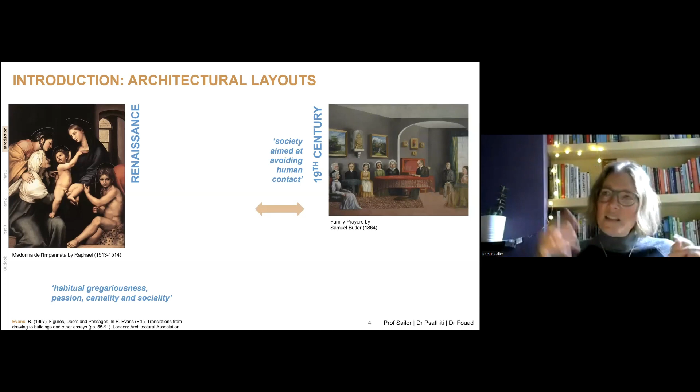A society that is based on human encounter. In the 19th century, looking at the painting by Samuel Butler, he says this is a society aimed at avoiding human contact. All of the people are kept apart, they sit by themselves, no one is even looking at each other, people are not touching. He says this is reflected in the floor plans of the time.

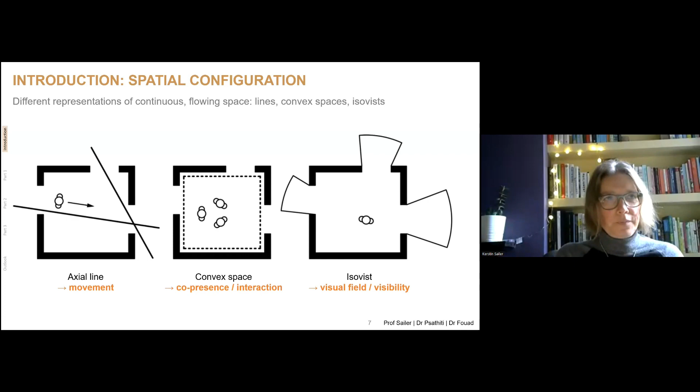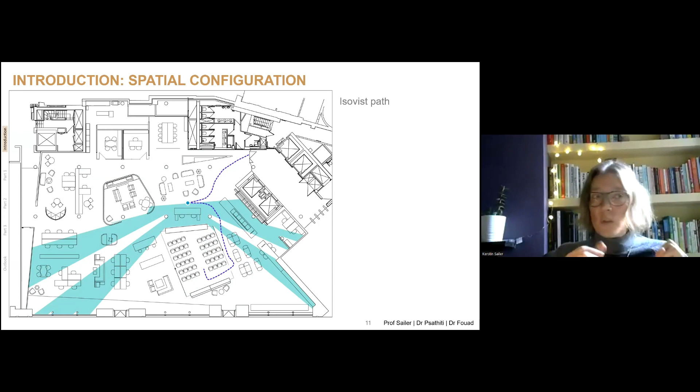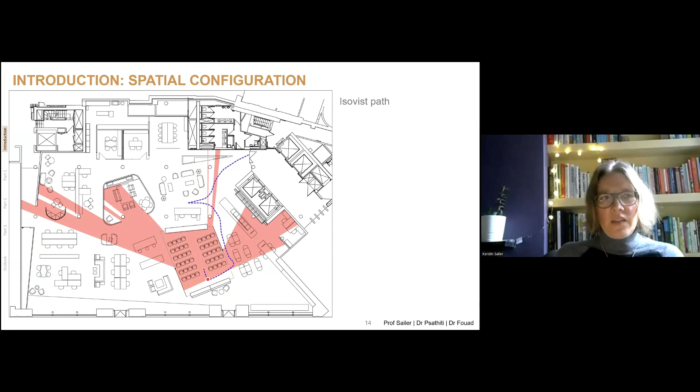As you stand in front of the reception, your isovist becomes a little bit smaller, a little bit more contained. They then send you to the seminar room. So as you walk past the kitchen, you turn, you enter the seminar space. And this is the perspective that you would have as the speaker of the seminar.

So all of those different realities would have happened consecutively, one after the other, as you walked through that space. If we overlay them, we begin to get a little bit more of a collective picture of what you have been able to see while you walked in there.

And you can see that certain areas have lots of overlays, so those are more visible from a lot of other locations, whereas there are some areas, for example this group of seats here, that you have not seen yet so far.

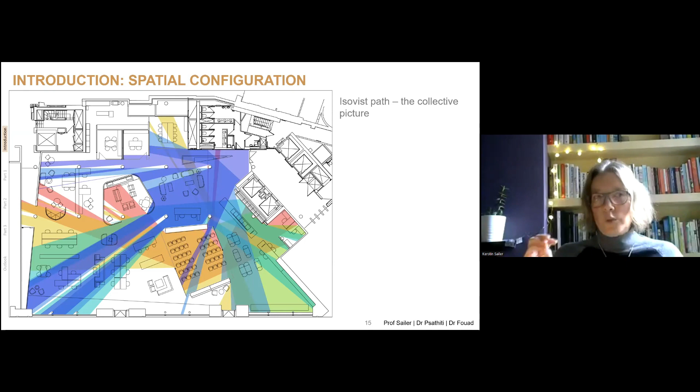So it's more hidden. Now imagine we do this kind of isovist generating from every single small location in the floor plan, and we systematically check any point location A to any other location B - how often do I have to look around the corner with these isovists - so we get a shortest path. And with that shortest path, we can then calculate how integrated a location is or how segregated a location is in the overall system. Why does that matter?

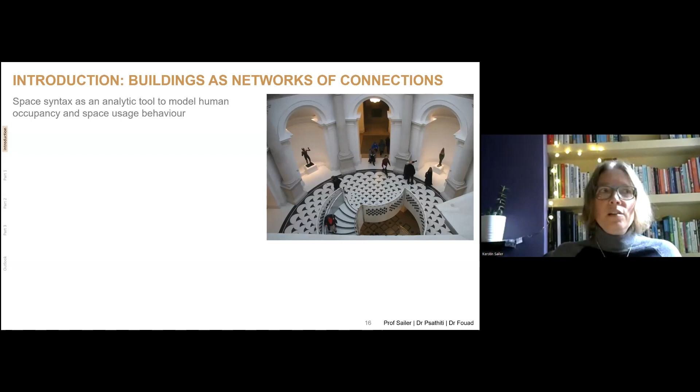Well, with looking at layout configuration in this kind of way, we can model human occupancy and space usage behavior. This is an example of a piece of work by colleagues of Bill Hillier, on the Tate Britain, a major museum space in London.

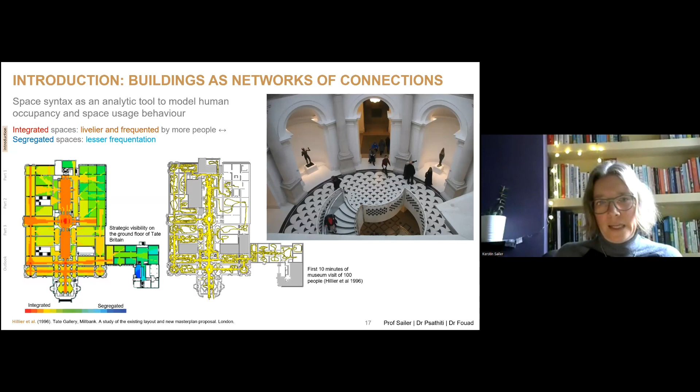So if we apply this idea to school buildings, in the course of this presentation we want to lead you through three different aspects. The first is school life - what kind of things happen in these school buildings in relation to its spatial configuration. Then we look at user perceptions, and those users can be teachers as well as students. And then finally, we want to look at managerial aspects - what happens when the school management, the senior leadership team, the head teachers, work with configuration, and also how they sometimes change the kind of movement flows.

So let's have a look. I will start this off with a piece of research that I have undertaken myself before I then hand over to my two esteemed colleagues.

In this piece of work, this is a book chapter published in 2019. The chapter is called Corridors, Classrooms, Classification. In this I make an argument about how the school layout becomes important for pedagogy and social behaviours. I bring together various aspects of learning spaces - I've listed a few of those, but if you're interested, please have a look and find that chapter online and you can read it.

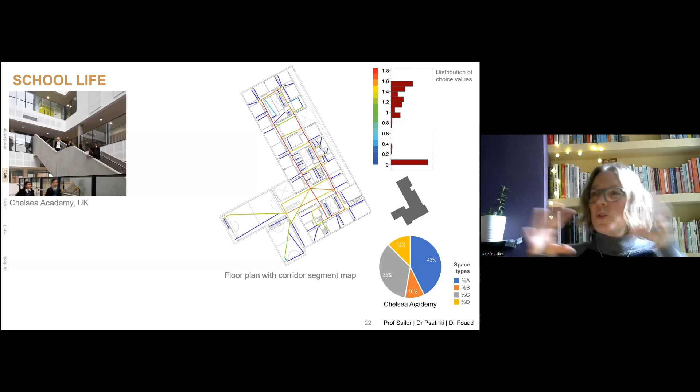And then we have D spaces that have more than one loop. D spaces are spaces where you have lots of choice locally—where you want to go next, you can decide quite freely. So those are the kind of configurational metrics that I want to look at in all of these examples.

If we look at this school here, what we can see is that there are two corridors, so it's a double corridor system. That gives quite some choice of how to move from one space to another. But locally, you can see here only 12% of these spaces have that much choice, so it's a rather traditional school with corridors and classrooms.

But as you can see in the photograph here, there's a lot of glass, so from the movement corridors you get those glimpses into classrooms. There's a little bit of overlap between movement and occupation.

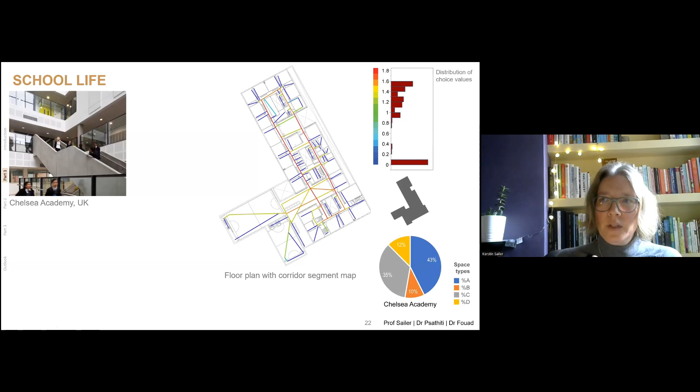If we look at the social life in the school, here's one quote from the book chapter: a particular concern of the pupils was the circulation system, since the school had to implement a one-way system to ease overcrowding between lessons. So here you get a glimpse of managerial interventions, where those two narrow corridors got really overcrowded, and the school introduced a one-way system to cope with that.

You should know that in the UK, students leave their classrooms after every lesson, and all 1,000 students would move to a new classroom within 5 minutes. So there's a lot of movement that happens in a very short point in time.

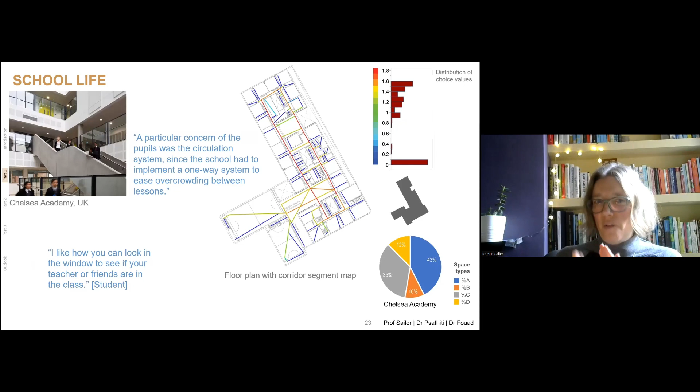Here at the bottom of the slide is a quote from a student who said, "I like how you can look in the window to see if your teacher or friends are in the class." So you can see that there is some kind of overlap between movement and occupation.

If we look at the second example, Kingsdale Foundation School, the school was refurbished. Initially you only had this kind of big loop with all of these buildings and those corridors going through here. But then the school was refurbished, and the interior courtyards received this big roof—they were roofed over, and those additional spaces in the center were created. That changed the school layout quite significantly to offer more choice.

So what we have here, again, is that double corridor system. You can see that choice is a bit more distributed here than it was in the previous example, and we also have a higher degree of local choice with more D and C type spaces.

The principal of the school talked about the previous design before it received that new roof and those interior spaces added to the school, and commented that it was an avalanche of bodies in the corridors breeding conflict. So it was really seen as problematic, similarly to Chelsea Academy, just too narrow corridors and lots of conflict. And the new design was meant to calm down and deinstitutionalize the space.

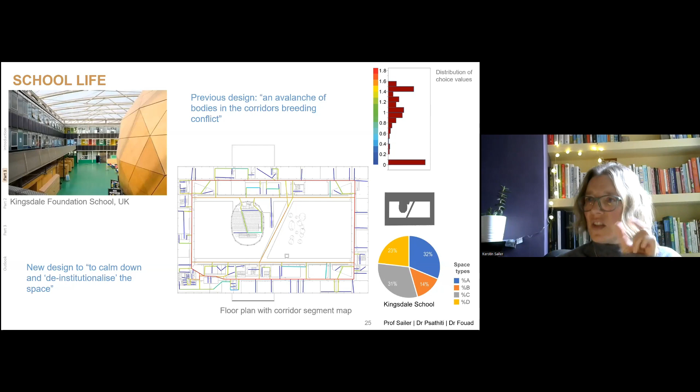You can see again that there's quite a few windows. So as you walk on those new corridors, again, you can get glimpses into the classrooms. So again, some overlap of what is happening as you move through the school.

The third example is a much more open school building, UCL Academy, in the UK. What you have here is, in some places, the corridor is completely dissolved. So you can see in this photograph here, a so-called super studio, those three big studio spaces that can host up to 3 classrooms in parallel. And the internal corridor here is not separated from the super studio, and as a result here becomes the most integrated line of movement.

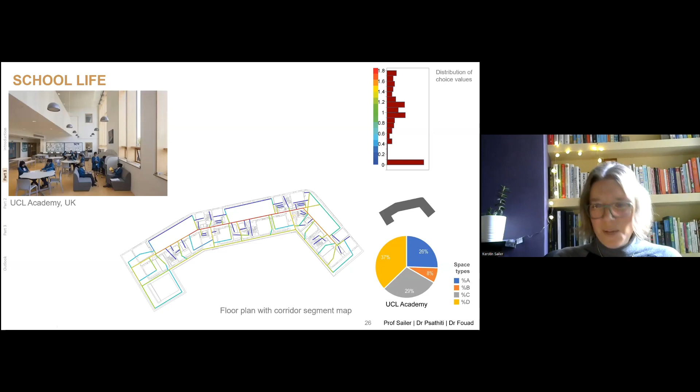You can see here in the distribution that this is reaching up much higher than in the previous examples, and also has a really big amount of D and C spaces, as you can see here, 37% of D spaces. So a lot more choice in the system. What happens when you add school life into the equation?

We've got anecdotal evidence from conversations with teachers here that suggests that the exterior corridor - there's a second corridor down here - is used less frequently than the interior one, despite teachers preferring students to take the exterior path. The teachers always tell the students, can you please use this kind of pathway on the outer rim of the school? But the inner corridor just offers a lot more internal connections and is the shorter path, so a lot of students would prefer to take that.

And this school building will feature much more in depth in the work of Dr. Fouad that you will see later. So this was an initial analysis, and then we decided to study it further.

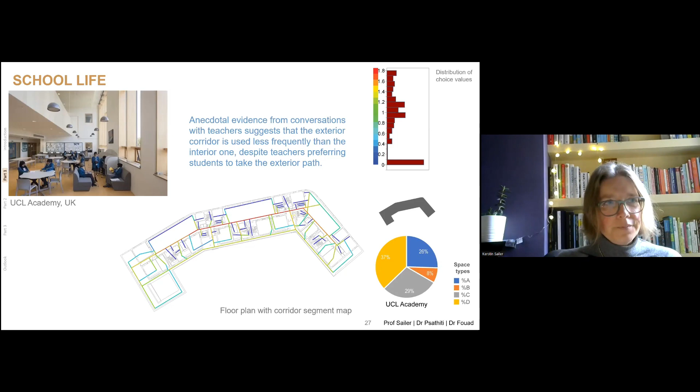The Ørestad Gymnasium in Denmark is, again, a very open school building. You can see this grand staircase in the photograph in the center that loops itself up through the spaces, and as such attracts a lot of the kind of movement paths around here. So there is not a lot of local choice, because once you're in the system, you are confined to those kind of central corridors, but there's a lot of overlap between all of the teaching activities and movement.

And this is also what you can see in school life reflected. So the principal has said it is a building that fits the pedagogy we're aiming for and that forces us to work differently. So that's interesting to kind of think about those two in tandem - what kind of pedagogy do we need for what kind of building structure?

And then from one of the teachers, a comment: I think it is so cool when you walk around that you can see your co-workers. Oh, someone is teaching there. What is he or she doing? Then you can stand there and watch and think, ah, okay, that is another way. I could also have done it like that. So there's kind of learning happening between the teachers on how to teach.

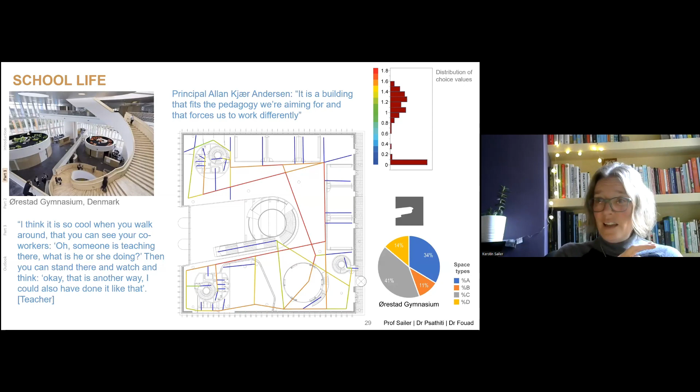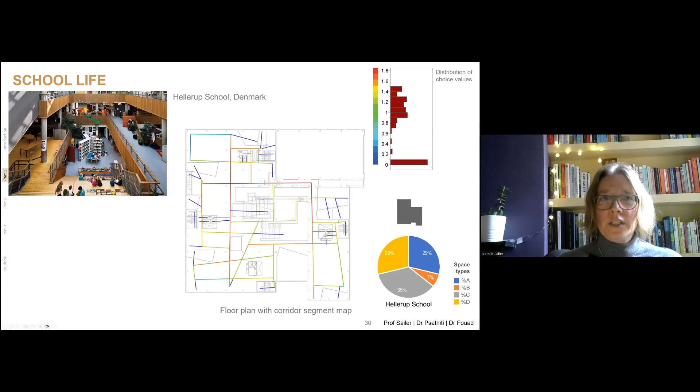And the final example, Hellerup School in Denmark, is a very open school. Yet again, as you can see from the photograph, there's a lot of local choice in the system. So you can see all of those loops in the layout here, reflected in this relatively high figure of D spaces, but not quite so much global choice in the system, but again, a lot of overlap. And again, managerial aspects come in here.

So here's a quote from one of the teachers: We as teachers and the children create small, intimate spaces with inventory on a daily basis. We use mobile partition walls to eliminate visual and audio-based noise. It is helpful for the children, especially the younger children or the not so integrated children, to have a sensation of, this is us, this is where we are. It is about creating a sense of joint ownership.

So what you see here is a school building that by its layout is very open and allows a lot of overlap. But then the teachers kind of close that off in daily activities, at least to some degree, to create more intimate teaching spaces.

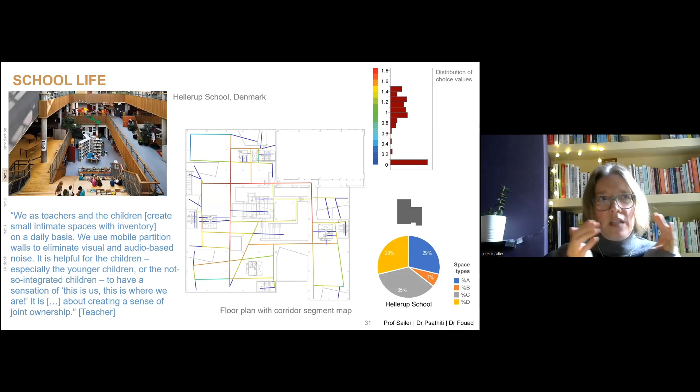So what this allows us to do, in summary, is offer an opportunity to look at school buildings in a detailed, nuanced way—not just say a school is closed or open with fixed pre-assumptions of how this would work, but rather look at the details and appreciate what exactly the spatial layout will do to the users, getting glimpses into school life.

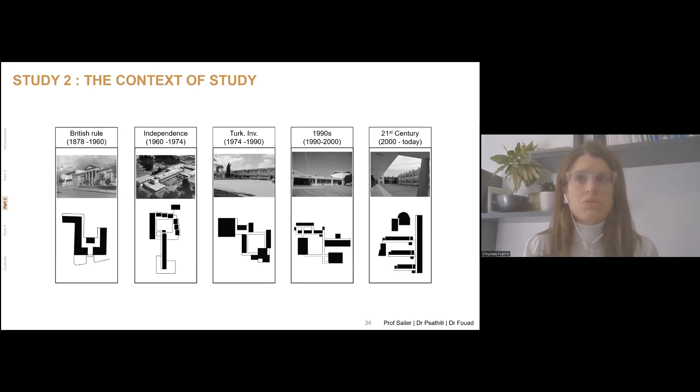Since 2000, the technical department of the Ministry of Education and Culture has assigned the design of school buildings to various independent architects, based on particular design guidelines that the ministry provides.

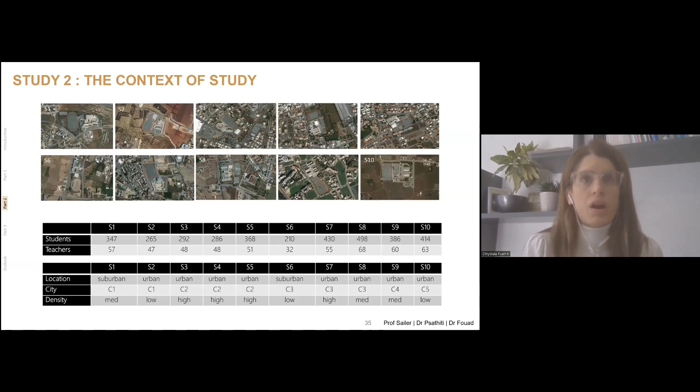Based on the fact that after 2000 we have 10 secondary school buildings built in Cyprus, I thought this offers a good common base, since they've been designed with the same design guidelines but by various architects. As you can see on the table, the 10 buildings differ significantly as regards the number of students, teachers, their location, or the density of the surrounding area.

As I mentioned, all of these schools have been designed based on particular design guidelines. Here I tried to visualize some of the most important guidelines provided by the ministry, capturing slightly the relationships between the spaces proposed there. For example, they propose the sports outdoor area be related to the sports indoor area and directly connected to the parking, located on one part of the plot. I'm mentioning this because it will make sense afterwards.

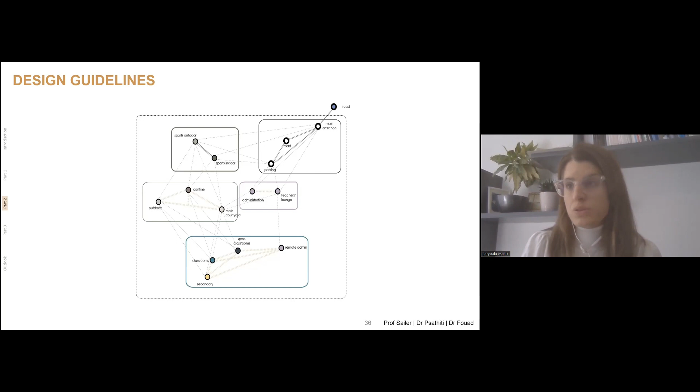So as you see from the functional allocation, the dark gray area is the sports area. All of the architects, without even collaborating, decided to put the sports area on one part of the plot. This served the ministry's purpose of having different access, so it could be operable after school hours—that's why all of the architects made the same decision.

Equally important, in the middle of the schools there are these light blue colored areas that are the courtyards. All of the schools are defined to a certain extent by the courtyards. Some schools have one central courtyard, such as school 1, while other schools have more than one courtyard—smaller courtyards and functional stripes associated with circulation lines.

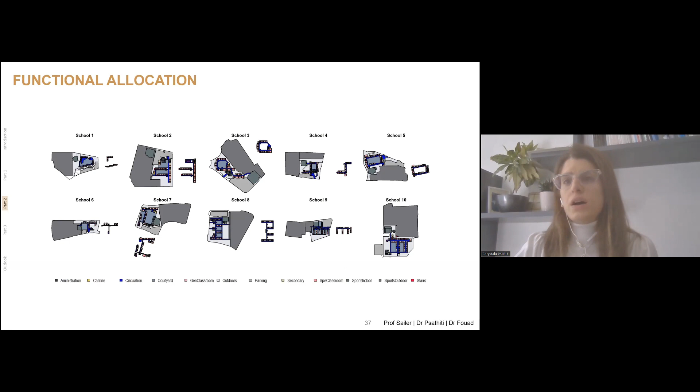If we could move forward, as you can see here on the composite assemblies of the built form, we have two different building types, school building types in Cyprus. We have the courtyard-based schools that are defined by this single courtyard in the middle of the school.

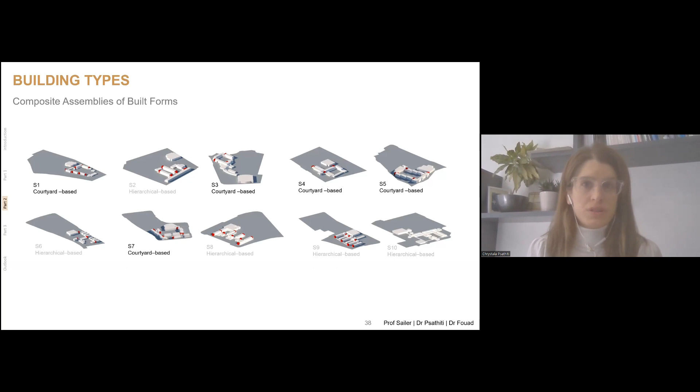And we have the hierarchical-based schools that are defined by various smaller courtyards and linear circulation systems. Next slide, please. This research, in order to understand more in-depth the spatial configuration, user perception, and school life, studies two schools into more depth. So here you can see the analysis that you have seen earlier from Kerstin, again a segment analysis, and we are studying here the choice metric.

So with the red areas, we're showing the areas that offer more movement potentials, are more integrated, and are more likely to be selected as a path, as opposed to blue areas that are more segregated and less likely to be selected.

By comparing the two schools, we can see that both schools have in the middle a red area, a very integrated area in the middle. The main movement corridor, let's say, is depicted by the analysis. In the case of school 2, the main movement corridor is depicted more, it's more red, because the two images are comparable.

But what is common also in those two examples is that the sports area that is on the left side of the plots is really, really segregated, so very distant from the main school unit, both functionally and behaviorally.

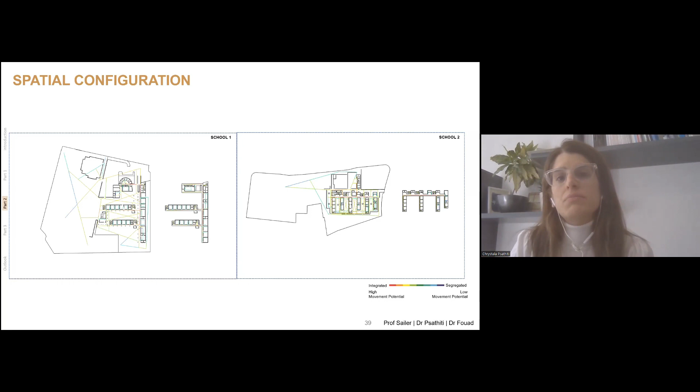So having said that, let's move to the next slide, please. We would like you now to answer for us which of the two schools do you think fosters a stronger school community based on what you have seen, at least for now. So if Ivan can take over just to circulate through this.

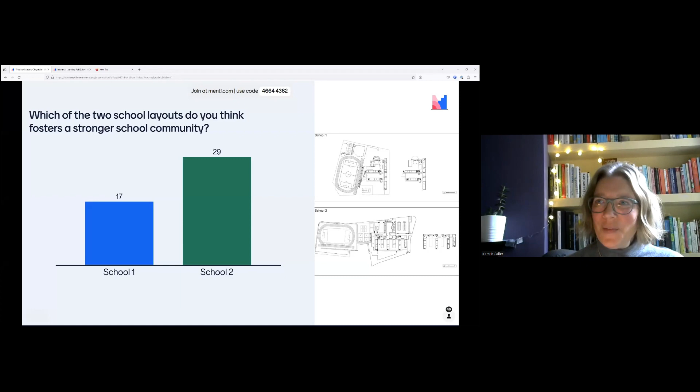Okay, so I won't answer which one, but we will find out, just to keep you more excited until the end. So I will give you now more insights into the school life of those two schools in order to be able to see whether your projections are right or wrong. So let's go to the next slide.

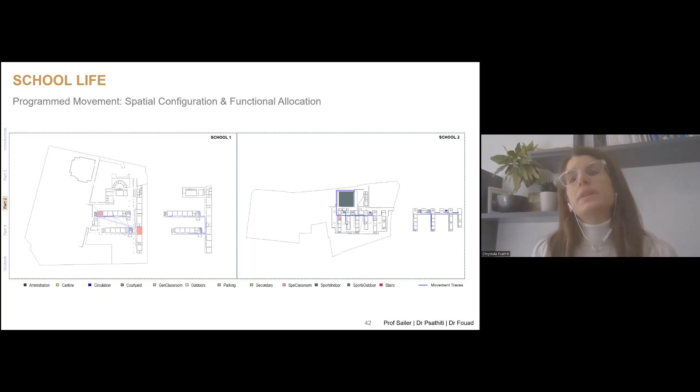Also, the importance of attractors for movement traces has been revealed by studying the entrances to the schools. I followed students entering the schools and traced the paths. School 1 has solely one entrance, while school 2 has three different entrances. This means school 1 releases students from a singular location, which is why the entrance area is very densely populated, as opposed to school 2 where users are split across those three entrances.

But again, we can see the role of spatial configuration, because those main movement corridors that we saw earlier on in the analysis are again selected by the students as their route towards their class or where they want to hang out until their lesson starts.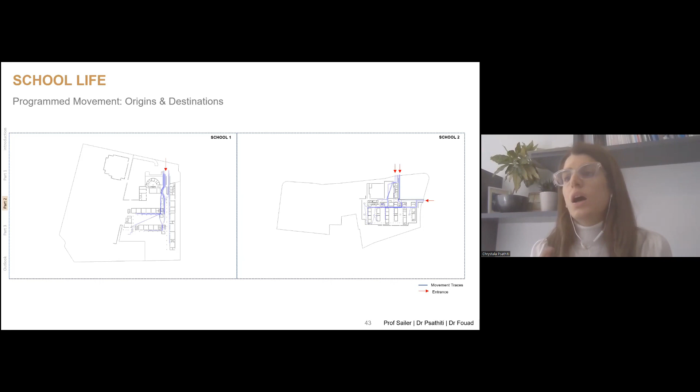However, movement is not always programmed, as I explained earlier. It's also unprogrammed and happens during breaks. So I also studied movement in schools during their free time, their break time. In this case, I studied them with a different method called snapshot, where it's like taking a photograph of the area and tracing the location of the students or moving individuals in the area.

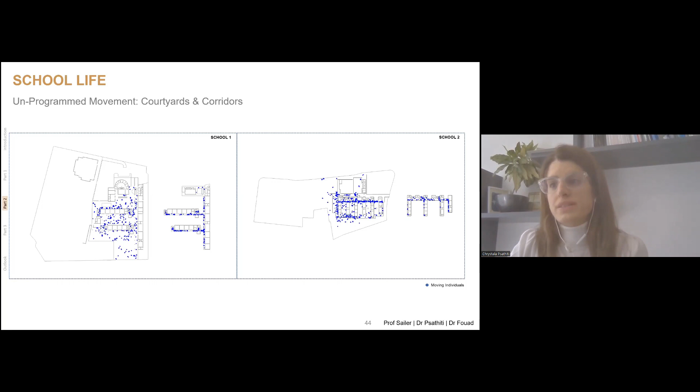What was very interesting by studying the movement distribution during breaks was that I realized none of the users, none of the students, used the sports area. This is very strange because they were free to go wherever they wanted, but in fact they weren't so free.

Both principals and both head teachers decided to eliminate the outdoor area, and it's here where the managerial aspects overlap with the spatial potential given by the schools. Because, as we saw in the analysis, those areas were particularly segregated, the school principals decided to limit the zone of operation for students in order to be able to control them.

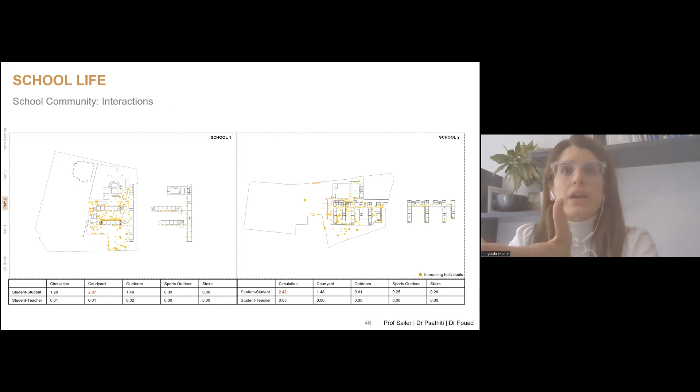Therefore, this particular gesture by the head teachers defined not only the movement, but also the places for interaction or for any other activity that students and teachers would do in the school during breaks.

Here I'm placing with yellow dots the interacting individuals, in the locations we saw either students interacting with other students or teachers interacting with students. With the red color on the table below, you can see that in school 1, interaction happens primarily within the courtyards, as opposed to school 2, where we have interactions between students primarily in the circulation areas. This is the significant difference between the two schools.

Also, the teacher-student interaction in school 1 happens in more than one space, for example in circulation, courtyards, and general outdoor areas. While in school 2, we have interaction between students and teachers only in the circulation areas.

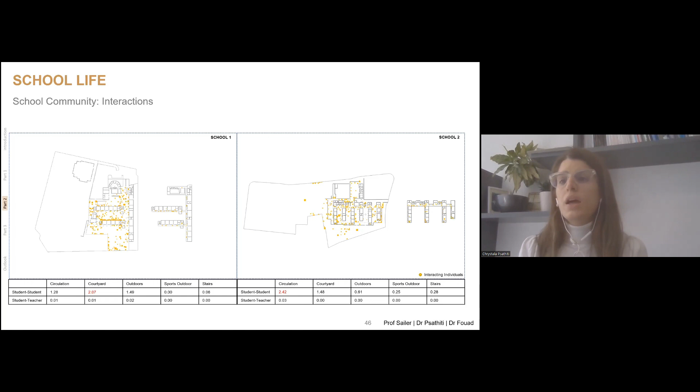Going one step further, in order to understand the school community better, I studied the synchronic co-presence of individuals in the schools. By synchronic co-presence, I mean how many students, teachers, or school users are located in the same functional area at the same time.

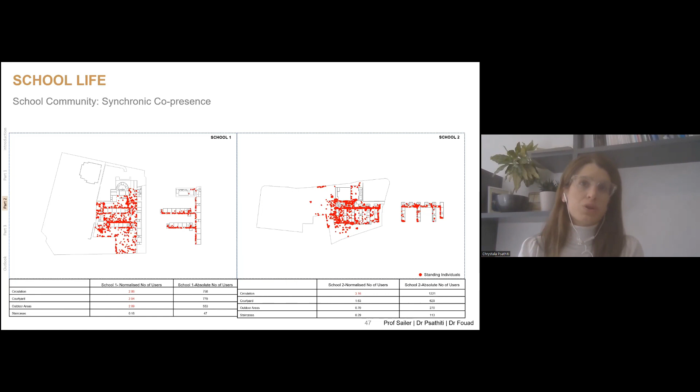If you see the table below with the red colors, the number of school users interacting in circulation, courtyard, and outdoor areas is higher in school 1 for courtyard and outdoors, while in school 2 we have higher synchronic presence in the circulation areas. So more simply, school 1 has interaction and synchronic presence almost everywhere in the school, while school 2 has interaction and synchronic presence of users primarily within the main circulation unit. Let's move to the next slide.

Going one step further, we can understand that to have this reality, both the spatial configuration and the managerial aspects played a significant role. For example, in school 1, the managerial decision of how to delimit the outdoor area created a structured, organized outdoor area in association with the built spaces of the school and the courtyards, the green area that binds all the areas of the school together.

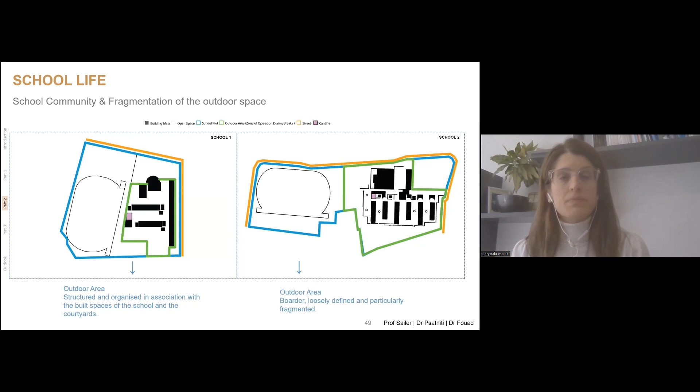So going back to your guesses on the Mentimeter, I would argue that it's school 1 that offers a stronger school community, because it has permanent forms of co-presence in space, as we saw with interacting individuals in the main courtyards. We have bigger and more frequent interactive groups, higher student interaction with teachers, more personal discussion with their teachers, and social labeling—whether female, male, or different ethnicity—does not have a spatial reinforcement.

As opposed to school 2, where we have a more temporal form of co-presence. Why temporal? Because it happens primarily in the main movement corridor, by means of movement rather than occupation. In school 2, we have smaller and less frequent interactive groups, less student interaction with teachers, more operational discussion with teachers, and social labeling in this school has a spatial reinforcement.

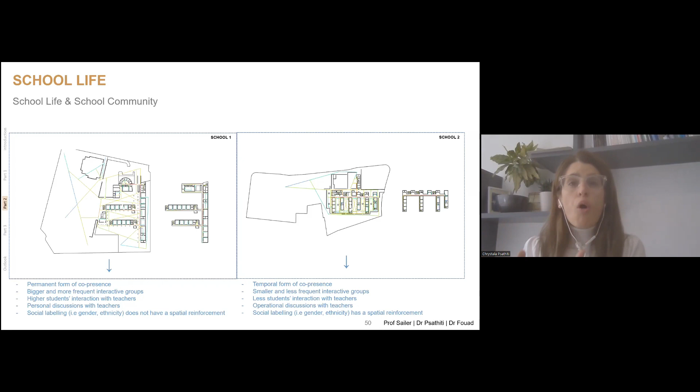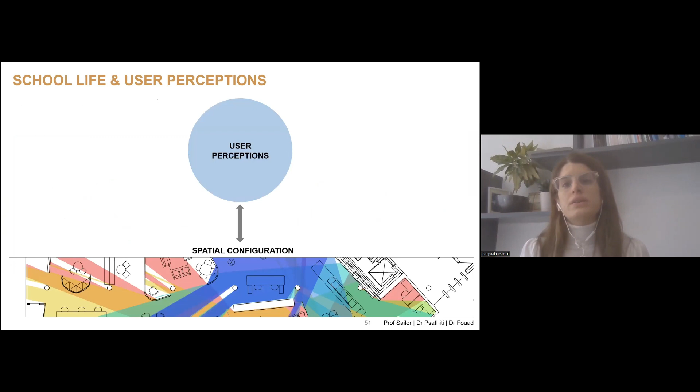Going one step further, these different aspects are also apparent in user perceptions. In particular, I studied students' positive attitudes towards school and the role of classroom location. By analyzing the spatial layout, the location of their classrooms, and students' perceptions simultaneously, I realized that how visually integrated the classroom is, along with other parameters such as how often students meet friends and their gender, can explain to a great extent—41% of student answers—how positive their attitudes towards the school are.

So having said that, it's important for managers in education and school principals to understand that by deciding who they place where, they are, to some extent, also defining how positive or negative students' attitudes will be towards school.

One last investigation was about teachers' perception and their sense of control and supervision. I realized that both the spatial configuration—the movement potentials offered by the school—and the school interface, or the interface of the school perimeter with the street, could explain by 51% a teacher's sense of control and supervision.

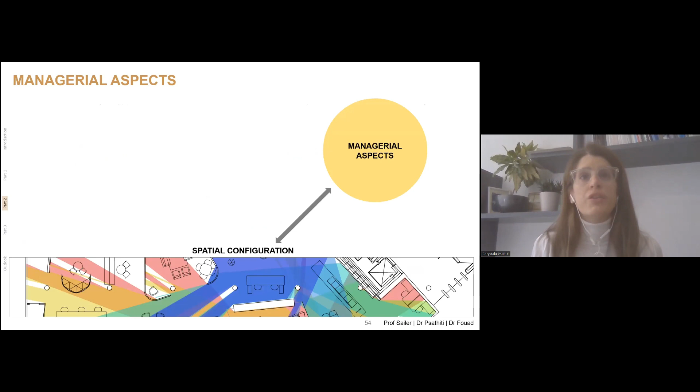So all of this, I think, leads to a great extent to various aspects that include managerial decisions, from macro scale to micro scale. My analysis showed that school design guidelines define to a great extent school building types, and in turn design decisions by architects define the spatial layout of the school. Lastly, the school users, given this particular spatial layout, make particular social actions—they enforce rules, make decisions—and those decisions, rules, and transspatial aspects define sociospatial realities.

So I think this is my closing remark, and I hand over to my colleague, Dr. Fouad.

Thank you, Dr. Psathiti, and thank you, Dr. Kerstin. Just a quick question before I start—to the moderator, Ivan—how much more time do we have so I can try to readjust?

Hello? Yeah, no worries, we do have enough time, as much time as you need, so we will do everything according to your timeline. Okay, thank you so much.

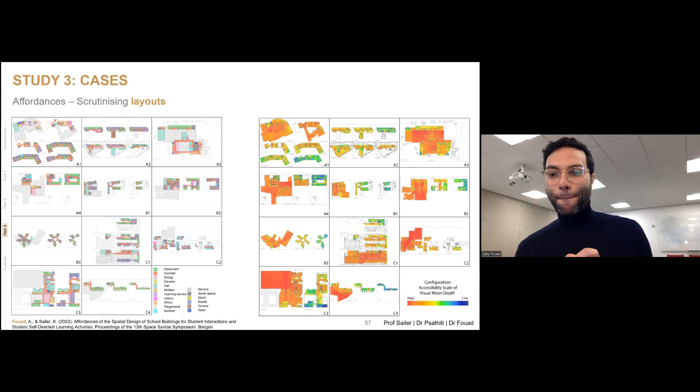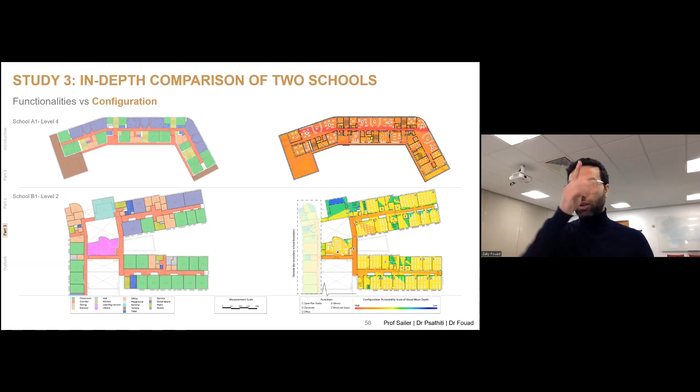As I said, I have 2 main schools in this study, school A1 across the top of the screen and school B1 on the bottom. The biggest difference you can see, and Dr. Sailer hinted at this in her presentation, is that in A1, which is technically UCL Academy, the spaces are open. The learning spaces connect to the corridor, and there is a very strong integrated, connected middle corridor - the red part you can see on the screen. School B1 is very different, because it is the conventional typical 2 wings connected by 1 corridor in between. All the spaces are closed. If you're walking down the corridor, you cannot see anything.

So let's do a similar exercise to what we did with Dr. Psathiti. Let's go to mentimeter.com, use this code or the QR code, and see which school, A1 or B1, would afford, accommodate, or have the potential for more informal learning activities. When I say informal learning activities, I mean students taking initiative to sit down individually or in groups to do activities like talking, revising, doing an exercise, studying - all initiated by the students, not by the teachers.

Maybe Dr. Sailer can give us some sneak peeks about the answers. Yes, there's 2 votes so far, so I think we need a little more time for people to vote. Come on, people, vote please. Yeah, we're like in a music contest. It's time for you to vote. There are prizes at the end if you vote. So I'll give some more time for people to go to Menti and make their guesses, and then I can share results.

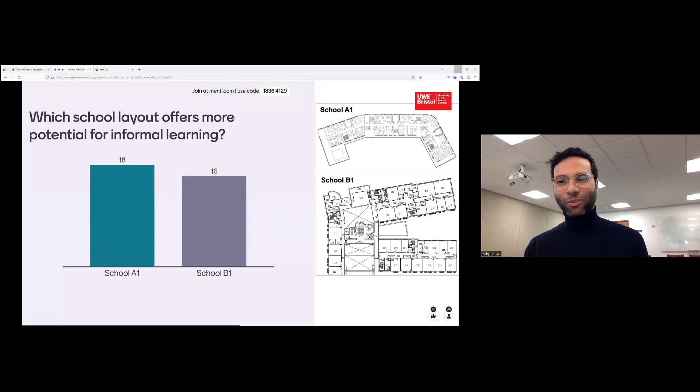Unfortunately, I was not allowed to take pictures of students in B1, but you can imagine them sitting in rows and columns of desks, everyone sitting in pairs or individually doing the activities. They have no connection to whatever is happening in the corridor. Next, please.

So during the lunch break, which is the big break in school A1, if you go to the other school, you will not find inside the building students doing any activities. But if you stay in A1 during the lunch break inside the building, not in the playground, you would see a diversity of activities happening in the corridors, in the open plan learning spaces, and in the classrooms. This could be interactions, studying, revising, even playing chess or board games, dancing, praying, relaxing, or even misbehaving. And this all takes place inside the building during lunch break in various spaces, as I mentioned.

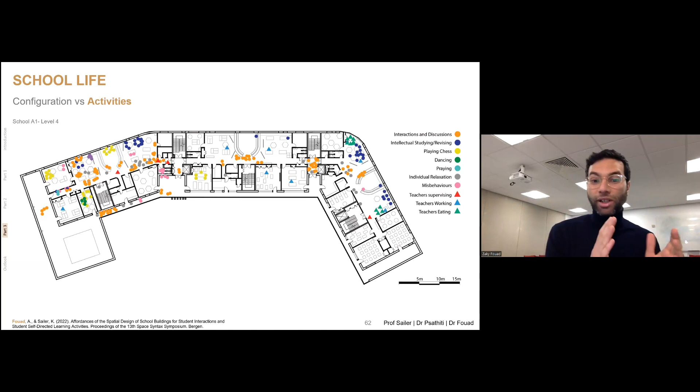If we go to the next slide, we ask the big question: are these activities related to the spatial configuration, or are they related to how connected or disconnected spaces are? The answer is yes. So one of my biggest findings in my life, not just in this research, is that there is a significant correlation between the type of activity that happens and how connected or disconnected the space is, which I measured using visual mean depth.

I think Dr. Sailer gave you a bit of introduction about how red spaces are more connected, and as it goes down in the spectrum, they are less connected.

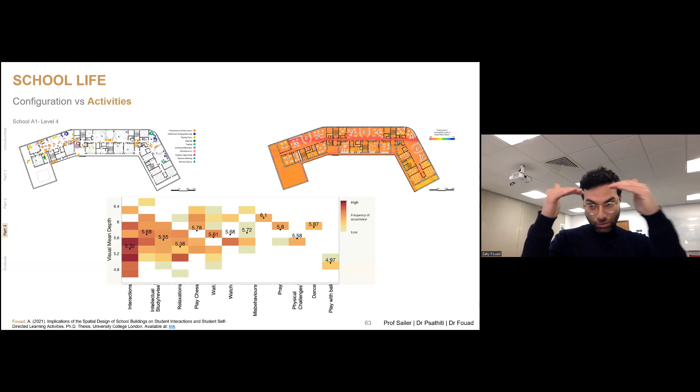So if you look at the graph on the bottom of the screen, you can see that students are misbehaving in the highest number, 6.1, which is the most detached, disconnected, or segregated space, but they are relatively more integrated or more connected when they are talking and interacting together. You would see some interesting activities like praying or dancing, where students also want to hide away, not to be very visible in front of other students or teachers. That's why they are relatively more segregated and so on.

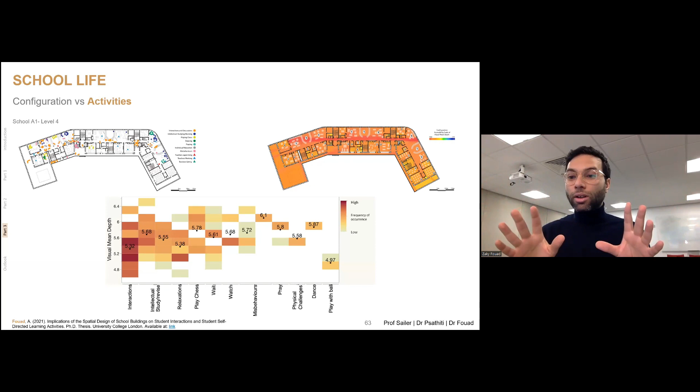So this spread of activity is not randomized, but it follows a certain spatial configuration pattern.

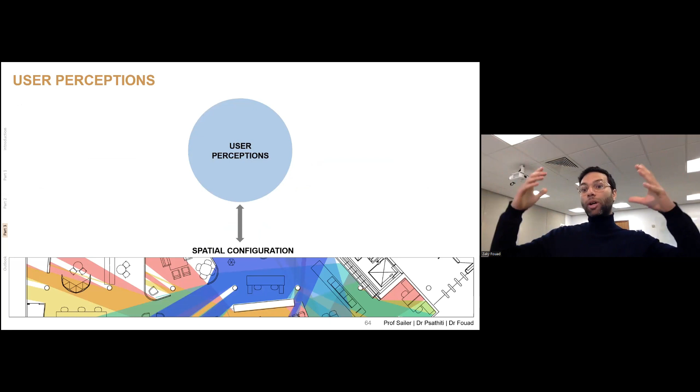Next, please. And now I'm going to take this slide and talk about the student perceptions and teachers' perception. Next, please. So we're staying with the same floor plan, same school, same time, almost same students. But now we try to see this relationship between the teacher and the student.

So the red triangles are the teachers standing in the corridors or inside the spaces. And as Dr. Sailer has referred to isovists, if a teacher is standing, what are they seeing in terms of visibility angle? So you can see on your left-hand side, the Western Open Studio...

The furniture where the students are sitting doesn't have a high back. So if a teacher is standing, they can see the whole open plan learning space. So they don't mind whatever students are doing, and they almost allow every student to be in that area.

If you go to the eastern side, to the far east or the middle open studio, you would see that the back of the furniture is a bit high. So if you're sitting inside this enclosure sofa, or what they call the forum space, you're not very visible from the corridor.

So guess what happens? The teachers do not allow every student to sit there. It depends on your behavior. If they know you have a good record of not misbehaving, you're allowed to be around the spaces. If you are a naughty student, they push you to the other end and don't allow you to be there. But you can see the stars on the plan - these are preferred spaces for students, and guess what, they are always a bit hidden.

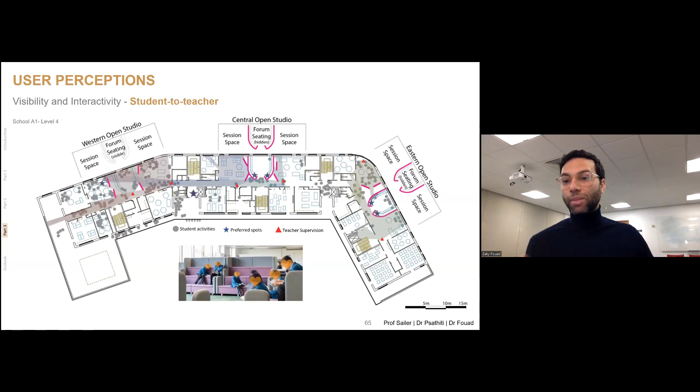Now I want to take you out of this enclosed building to see what's happening in the playground. We're trying to see again how teachers and students perceive spaces versus the students' preferences. On the top row, you see the playground of school A1 over two levels, level 1 and level 2. On the bottom, you see the playground of school B1.

What I really want to show in this slide is these numbers in red, 35, 48, and 36 - the area marked as the backside of the playground. For the teachers or the management, this is the backside of the school. Also for the architect, this is the backside. So they assume it's not that popular, but if you count the number of students passing in 5 minutes on average, it is these numbers: 48, 35, and 36. It tells you that this area is popular, not the backside as the teachers perceive it to be.

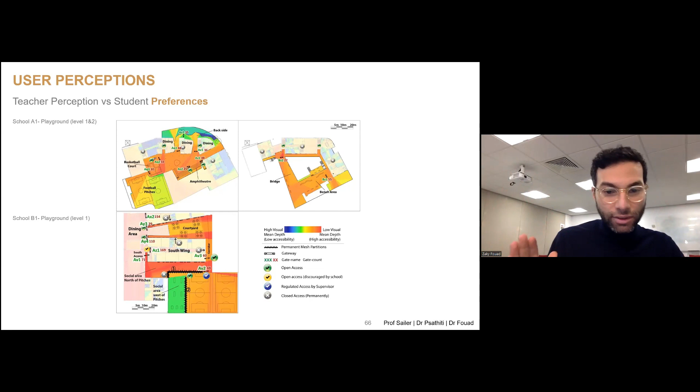In B1, we have a similar case where the corridor on the far right side - yes, this one - the number of students passing in 5 minutes is 60. This is also the back corridor perceived by the architect and the teachers to be the back corridor, and actually the teachers prefer if students take the other front route, that is AY4, AY3. Yet you don't see that much of a difference between both of them - again, teachers perceiving a space that does not match the preferences of the student.

So if we take this idea of the mismatch between the teacher's perceptions and the student preferences and try to see what activities happen in space - why is this backside very popular in school A1? You would find out from this scrutiny this backside is used for actually playing football. So some students use the main playground because they are very confident and skilled in football, so they're not afraid of being seen by other students. But there's a lot of other students who are not that good at playing football, and they still want to play football.

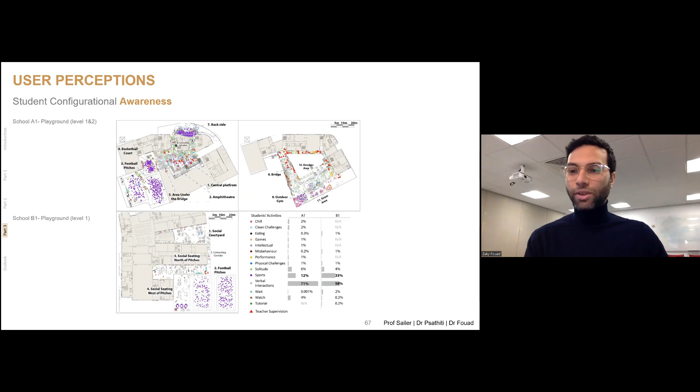Okay, now we're moving to the managerial aspects - how these spaces are reconfigured by the management.

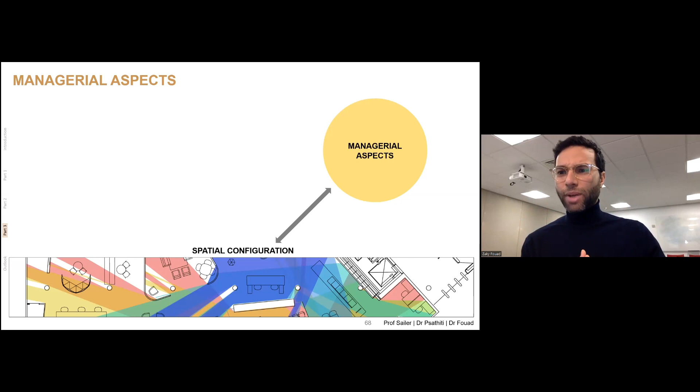You remember one of my first slides where I showed School A1 being open, students doing different activities during the lunch break. Guess what? That doesn't happen when there is a class.

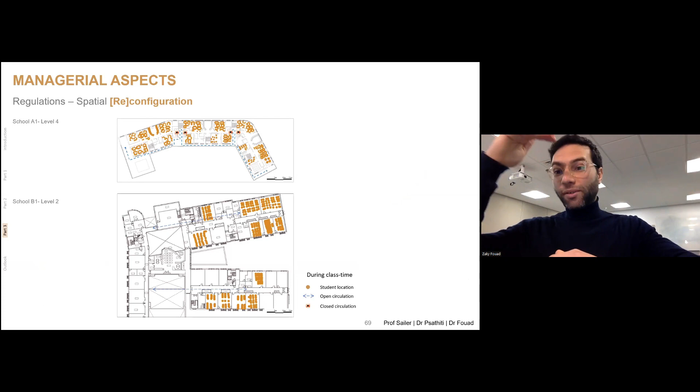Dr. Sailer has hinted how this school has two corridors, internal and external, and the students, by research and by numbers, prefer the inside corridor. So how does the school respond during class time when they want discipline and no noise? They close down the entrances of the inside corridors. You can see these X's with a red circle - they close down technically the gates where you can get in.

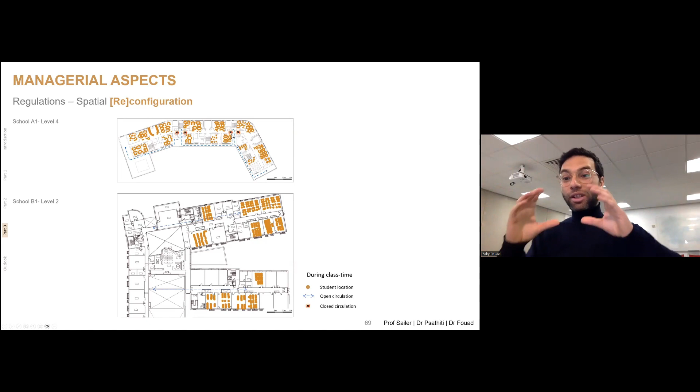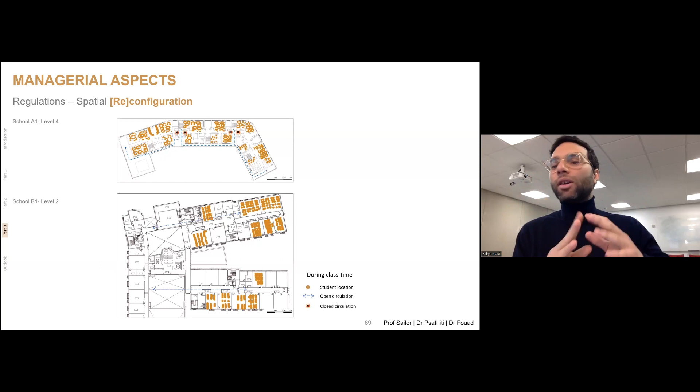So they change this open plan learning space into a typical classroom. They can even have partitions to separate the space into a typical classroom. And they activate the outer corridor for students to get into their classes. So you can see that the spatial configuration is reconfigured - it's almost a new school when classes are happening.

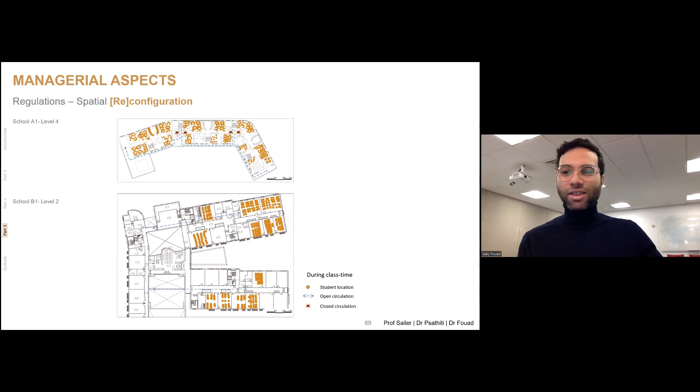What's happening on the other school, B1? Well, technically it was a closed plan in the first place, closed corridors. The school doesn't need to change anything. If you keep it the way it's designed, it operates the way they want it.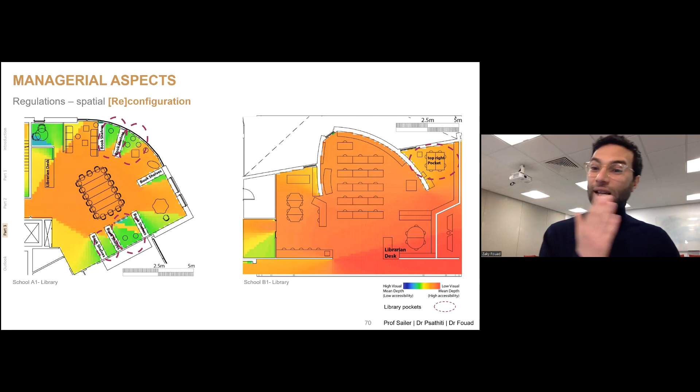Moving from the corridors and open plan learning spaces, and the playground, now we're looking at the library. On the left-hand side you can see A1, and this library is a bit more disconnected than library B1. You can see more green and yellow colors, but on the other side more red. Does that impact how the library is being used? To some extent - let's see in the next slide.

You can see that although the library of A1 is a bit disconnected, there aren't many regulations by the librarian. Students can do whatever they want, and they make use of the pockets in between the shelves. You have these rectangular shelves with pockets in between which are not visible to the teacher, and students feel free to sit, relax, talk, interact, read a book, and do whatever they want.

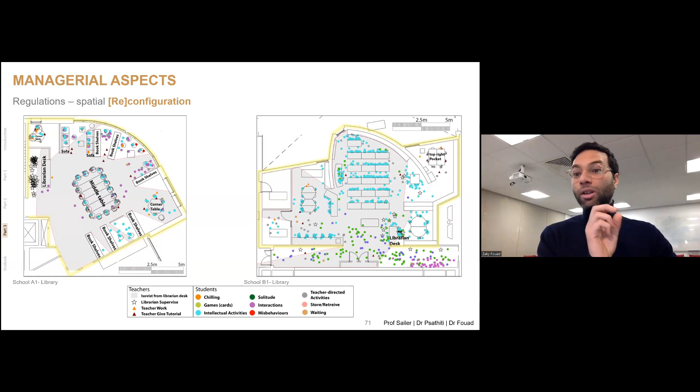Dr. Sailer has pointed out what an isovist is - it's like if you're sitting or standing somewhere, what you see. So the gray area on both images shows what the librarian can see. In the white areas in A1, as I said, students do whatever they want. In the white areas in B1, guess what happens? The librarian enforces strong regulations - you are not allowed to sit in this area unless accompanied by a teacher to do a tutorial.

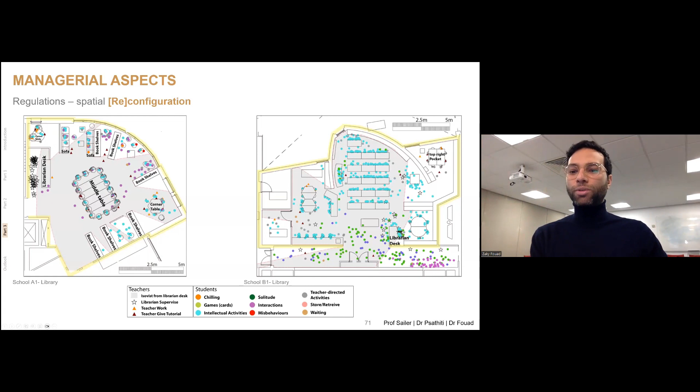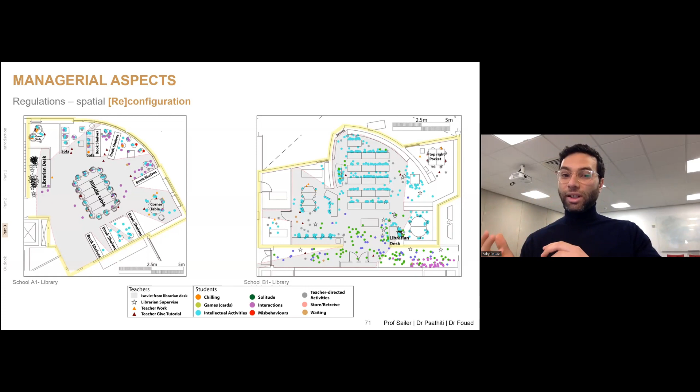So exactly this top right pocket - they are again reconfiguring the space to fit what they want and to change the original design. You can clearly see there are more students in B1, technically because this is situated along a very busy corridor, as you will see in the next slide. Whereas in A1, the library is a bit segregated, so students only go there if they need the library.

If we look at what's happening in B1, on the far left-hand side you can see two corridors from the two wings that merge into the corridor on the right-hand side of the library, highlighted in yellow. This corridor is the intersection between the two wings of the school, so if you're moving between wings you have to pass by the library. You can even see in the picture that the library is designed to be an open space - the wall is shorter and you can see what's happening inside just by walking in the corridor.

Guess what - the teachers and management don't want this corridor to be busy or noisy, so they put up signs: this area is monitored by CCTV. If you are caught in this area, you're going to have a penalty or something. So they are trying to force the students away from this area.

How do the students respond? If you look again along the yellow part of the corridor, the red dots - situated in two different boxes. The orange box is an area where students put their bags. You can imagine how lazy the students become, standing and putting the bag down for so long because they want to interact and talk. Once they enter the library space, you can see the dots, which are orange, for students moving and interacting, change into green.

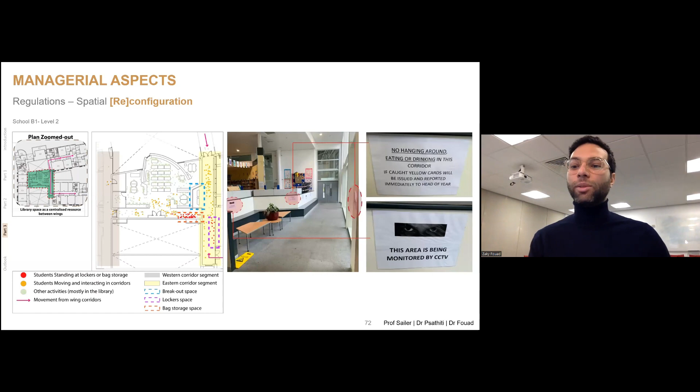Moving from the library to talking finally about the dining spaces, I don't want to go into much detail, but I just want to show you that here it is inverted. There are more regulations in A1 in the dining areas than in B1. Why is that? Because the school allocates a dining space to every student.

So let's say me, Zaky, you are going to be eating in dining A. I cannot go to dining B to get my food. I have to go to dining A. Accordingly, if my friend is eating in dining B, we have to finish eating quickly and we meet outside the dining. So the dining space is not a social space.

This is very different in B1. Why? Because the dining space is almost the only indoor space where you're allowed to talk. So every activity can happen in the dining space with consent from the teachers. So it's much busier with eating plus other activities.

The only dining space in A1 that has activities not eating is the far east dining space on level 2, the one highlighted on the right. Why is this happening? Because teachers tell some students, if you need to revise before your exam, go to dining D, or the one on level 2, which is a bit segregated and you can use the space to study.

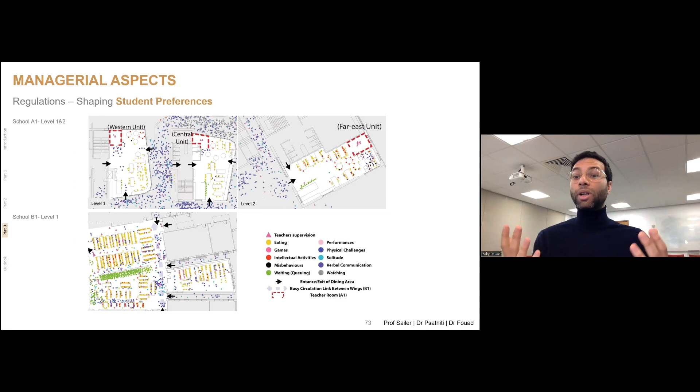So you can see the different patterns of activities that emerge from changing the managerial aspect. And this brings me to the next slide, which is, again, one of my happiest findings in life. So technically, this graph, let's explain it a bit.

On the x-axis, you see the time interval, so almost the schedule of the day in the two schools. On the y-axis, you see the configuration, as in how connected or disconnected the space is. The highlighted boxes are the lunch break. On the left-hand side, you see school A1. Can you see this gradient from dark brown to the other end of brown, like the light brown?

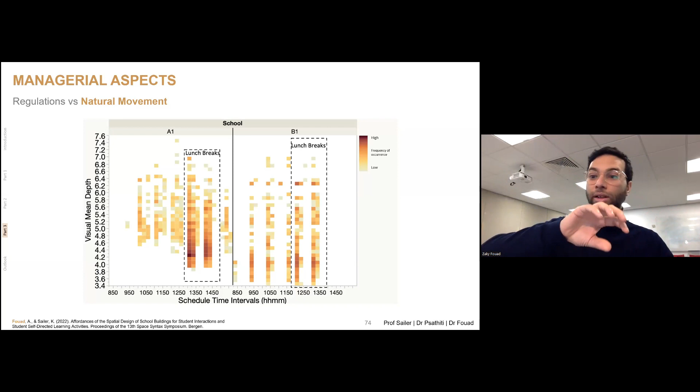What's happening here? Movement or activities and movement revert to the natural way, what we call the natural movement. So more students are located in the more connected spaces, so they are doing more activities in the more connected spaces, and less students are located in the less connected spaces. And this is a gradient from the dark brown, as in more dense number of students, to the lighter brown, less number of students.

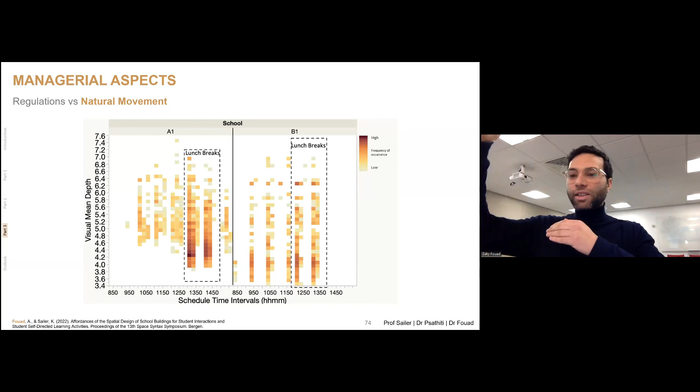On the other side, what is happening in B1? It's very different. This gradient is not, it's not a gradient in the first place. It is randomized colors. Why? Because we have allocation of activities and movements in certain areas. So that doesn't match the natural way people would be moving.

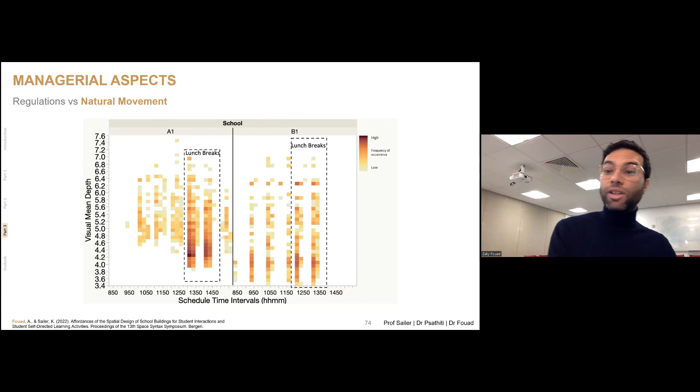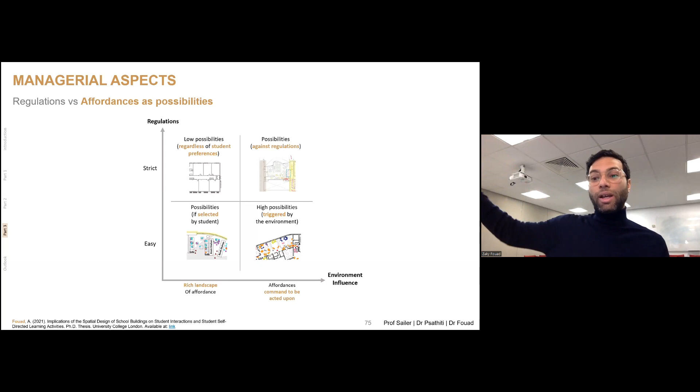But what happens when you have a very strict environment, but you also have affordances that trigger you or command you to act upon it? You see what happens next to the library in B1. So technically, you have a space that triggers you to stay in, to talk, to move along it, but the management is restricting you. So students act against the design, against the regulations to follow the design. And this is very interesting to see this almost dichotomy between managerial aspects and what happens influenced by space.

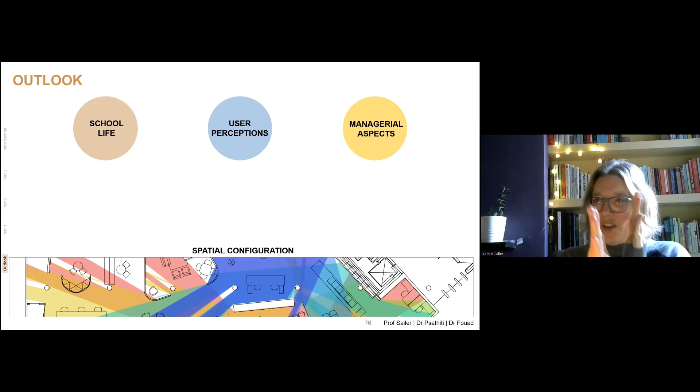So we've tried to kind of pull them apart to some degree to say, this is school life, this is user perceptions, and over there we've got the managerial aspects. But of course, in true life, they're all kind of interlinked and depend on each other.

As we move into the Q&A, and we're very happy to take any questions you might have, but just to spark some ideas or spark some thoughts for discussion on school life, really a question that we could explore is, what forms of school life are actually desirable?

What do we want users to be doing in school? Do we think of school as just a place for learning? Or is this a place where we want students to stay, for example, and use as a socialization space?

On user perceptions, how important do we actually think user well-being is? Or do we only care for the end results, how good they are in exams?

On the managerial aspects, how strong should management influence be actually? And the final question on spatial configuration, because we are aware that in Kazakhstan you have more closed classroom systems, but really just open up the idea of, would more open schools actually work in a Kazakh context?

And the final point for you to think about and take away is that interrelationship between pedagogy and the school building. So if the pedagogy and the school building are in line, if they both try to achieve the same kind of thing, it might be easier to manage the school, but we have also seen plenty of examples where those kind of go against, where the school building tries to achieve one thing, and then the school management is trying to achieve another.